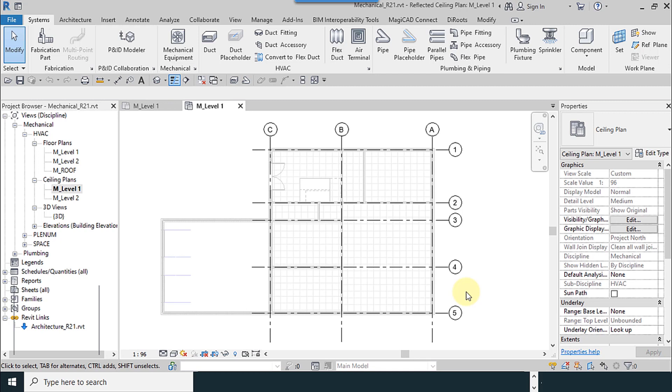In this part of our training course, we want to teach you how to place diffusers. For adding diffusers on the drop ceilings, we have to select the air terminals.

We have three tools here: load family, model in place, and air terminal on duct. This is for loading families to the project, and this is for drawing the model family in the project. And air terminal on duct belongs separately.

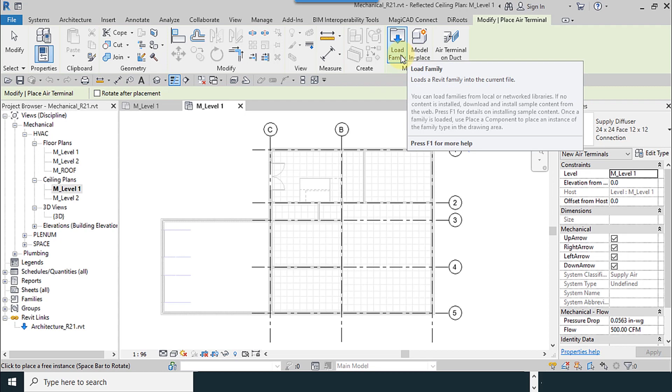We have exhaust grill, return diffuser and supply diffuser, and two types of supply grills: double deflection and perforated.

We leave them for the moment. Maybe they must be placed on the drop ceiling, or maybe we want to branch it from the side of the wall.

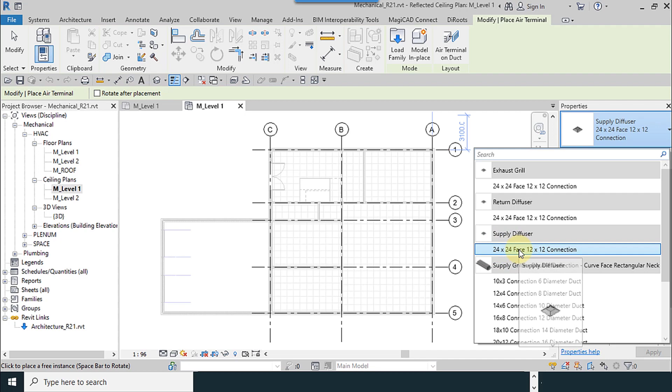So these values are defaults for supply diffusers. Its dimensions are 24 by 24 and its connection is 12 by 12, and our units are inches.

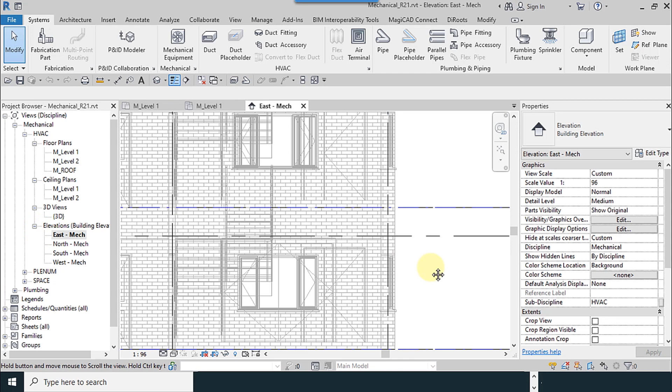As you can see, you can't see the diffusers until you make an offset for it. For this, you must go to the elevation view or make a plan section.

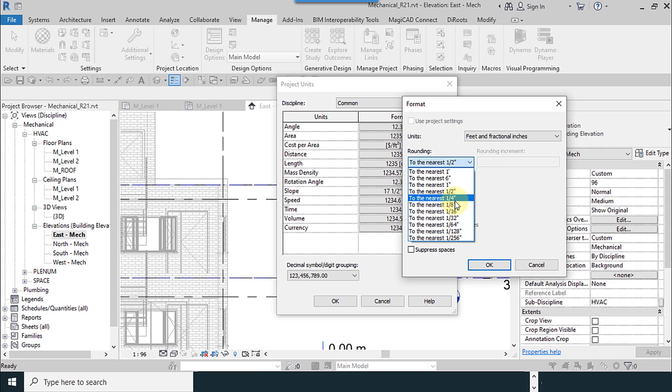Our units are millimeters, so I need to change this to imperial units: fractional into feet and fractional inches. 1 divided by 8, okay.

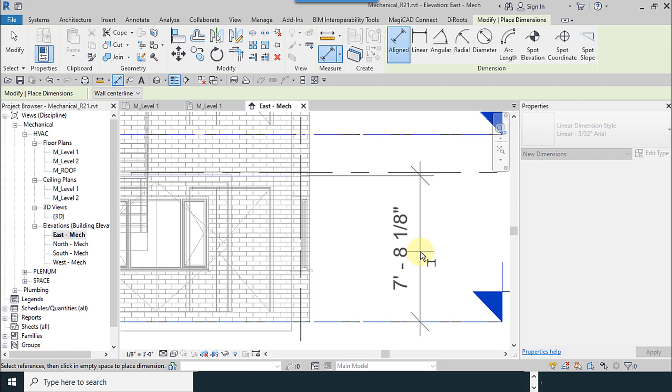So I select the dimension from the bottom to the bottom of the ceiling. This is our height, 7 feet and 8 1/8 inches.

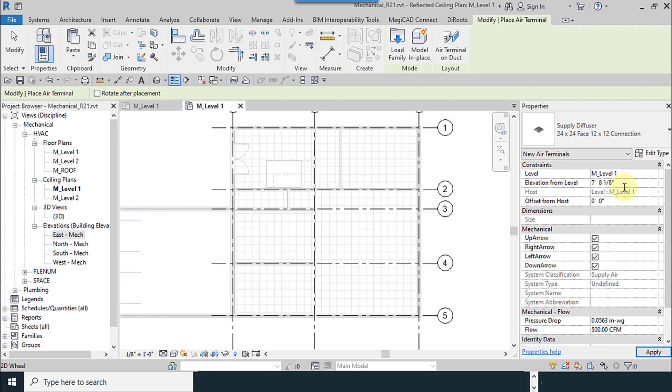So I go to Systems, Air Terminals, elevation from level, I change it to 7 feet and 8 inches, spacing 1 divided by 8, so we can see the diffuser.

For example, I place it exactly on tiles. Maybe it's not exactly on tiles.

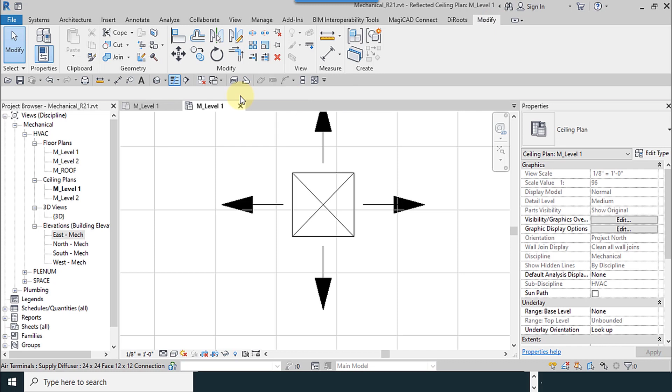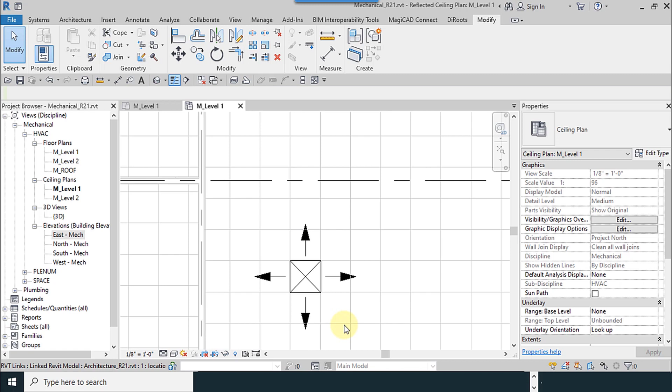For modifying these, we go to Align, and firstly I select the main line and the secondary line, very easily. And the size of our tiles is 24 by 24.

I create a section plane here. This is one type of our diffuser. There is another type of diffuser here.

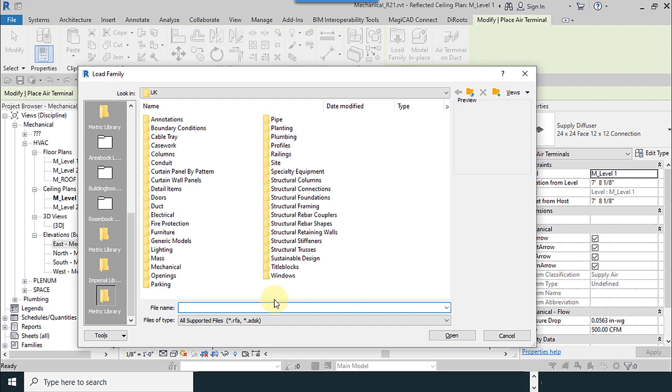I go to Air Terminal, Load Family. I go to mechanical, air side components, air terminals.

We have another type of diffusers. Its host has different settings. It has hosted, but the last one hasn't the host, but we need this one.

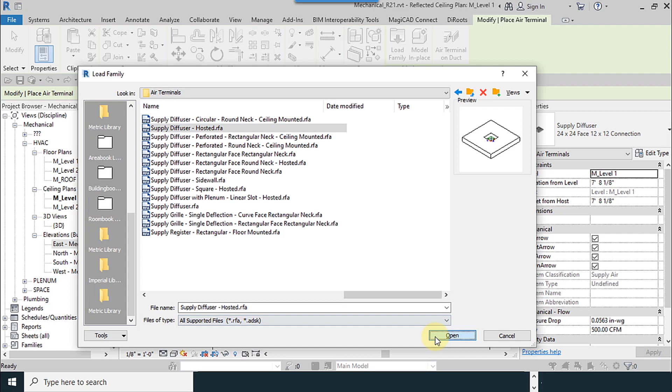Okay, so because the place on vertical face option is available, I change the option to place on face.

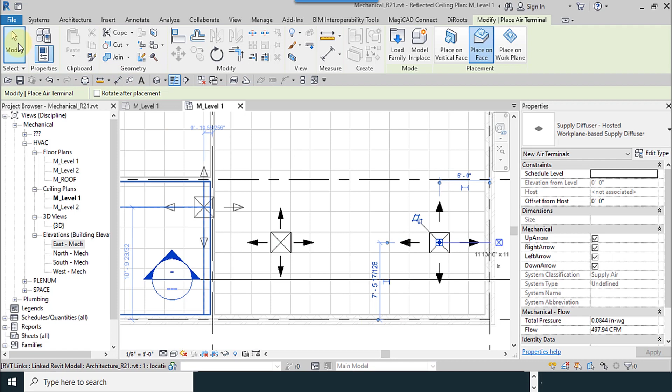Click one time. I go to the section view. We have two diffusers here. What is the difference?

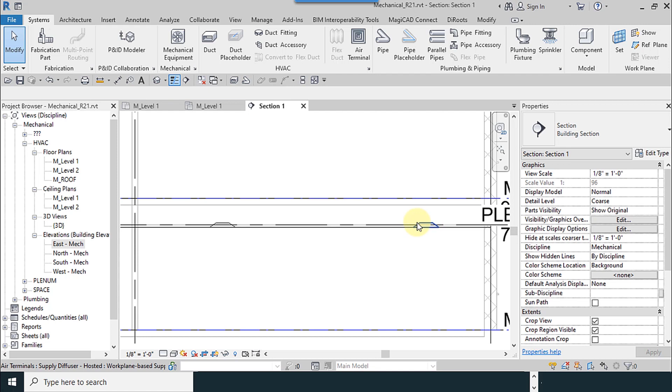If the architect comes and changes the elevation of the drop ceilings, the height, the elevation of your diffusers will automatically change. Okay, so I go to this file to show you how it works.

I go to the architectural file and change some amounts. I go to the section view, go to view, I select the drop ceiling, I change the values to 2.

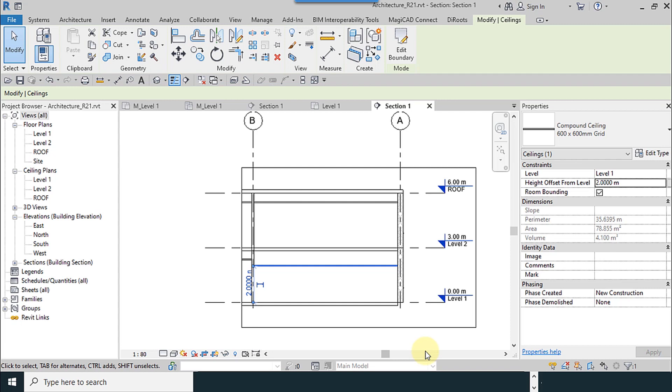Save the file, then close all the unnecessary windows. Saving is necessary. Reload my file.

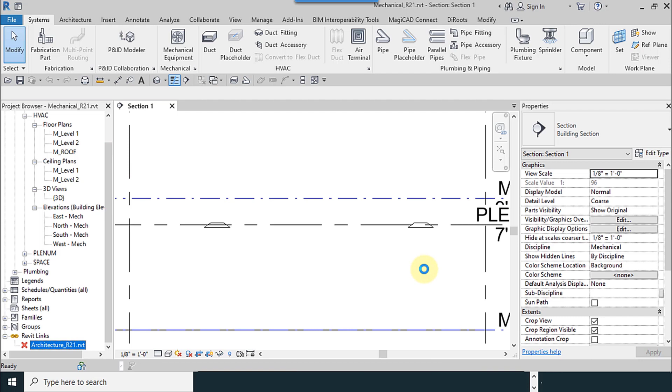Okay, the hosted one has changed its elevation, but the non-hosted one remains in its last position.

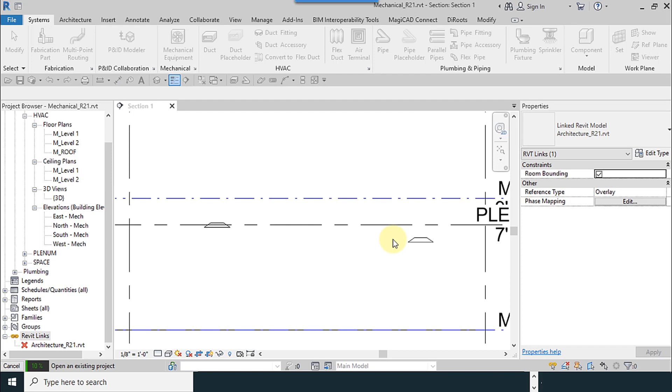Okay, so I redo my changes to its original elevation. Save the file again, reload again.

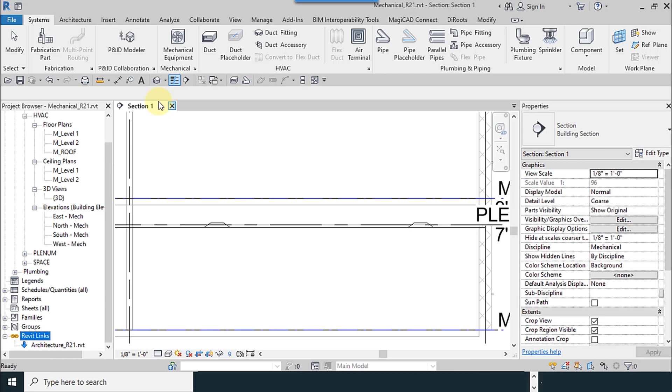Now everything is okay now. I go to Level 1 Mechanical.

I want to use the family type belonging to Titus company. Load a family.

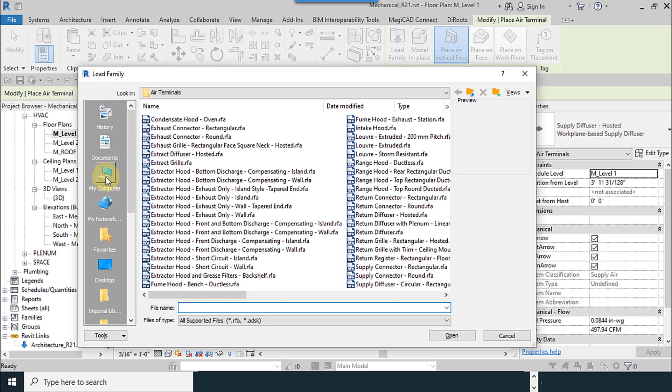It is better to use the real families. I will share these files with you.

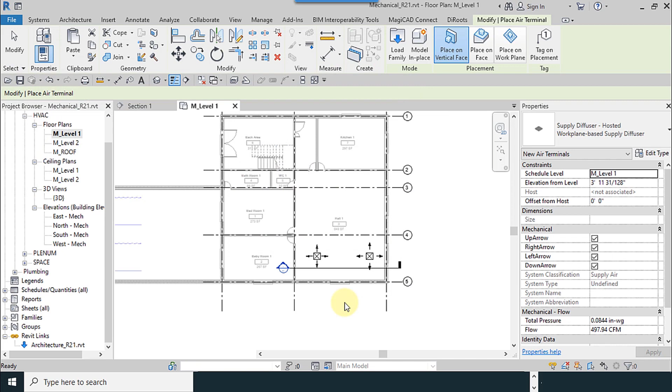Mention that I have to add this file.

Place on face, and it has these two options. And what is this? Place on work plane.

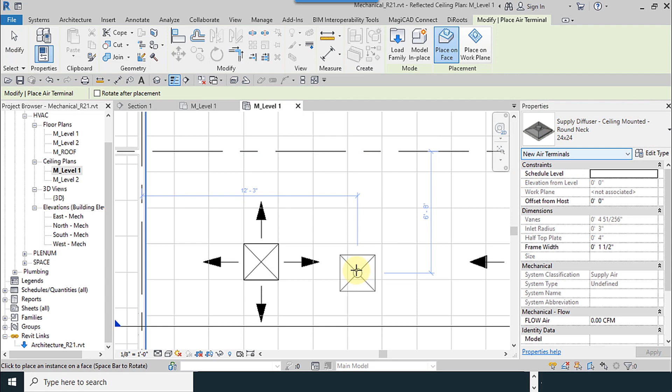I go to the drop ceiling's elevation. The dimensions are 24 by 24.

I go to the 3D view to see the differences. The difference is in its connectors. Our connector is square, but here it is rounded.

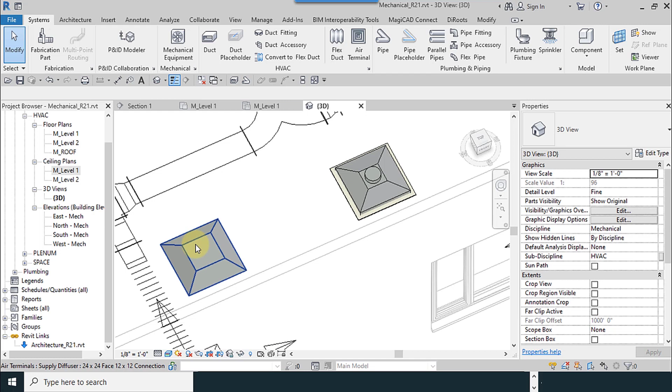But the square one is connected straight to the diffuser. This lesson will continue.